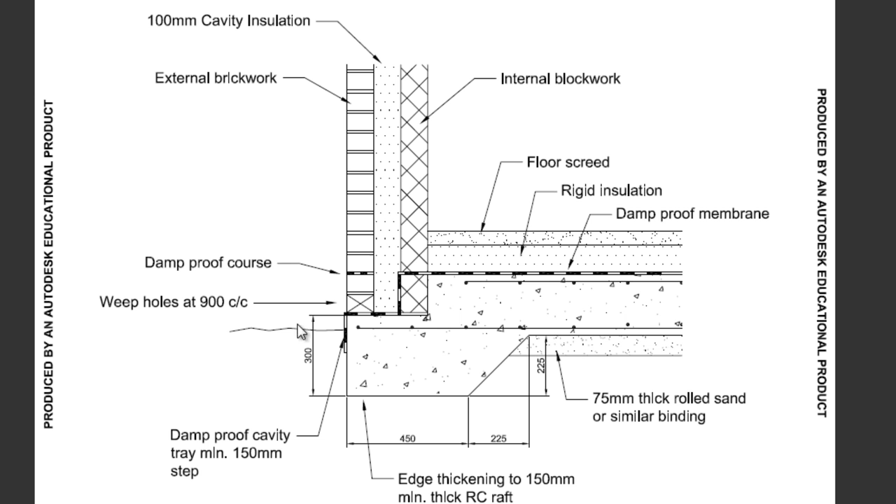Information we have: this is the foundation detail handout with all the annotation. There's not many dimensions on this. There's a 75mm thick sand bed here, 450, 225, 300 down from the bottom of the bricks. You'll notice this is the ground line, and the bricks are above the ground line.

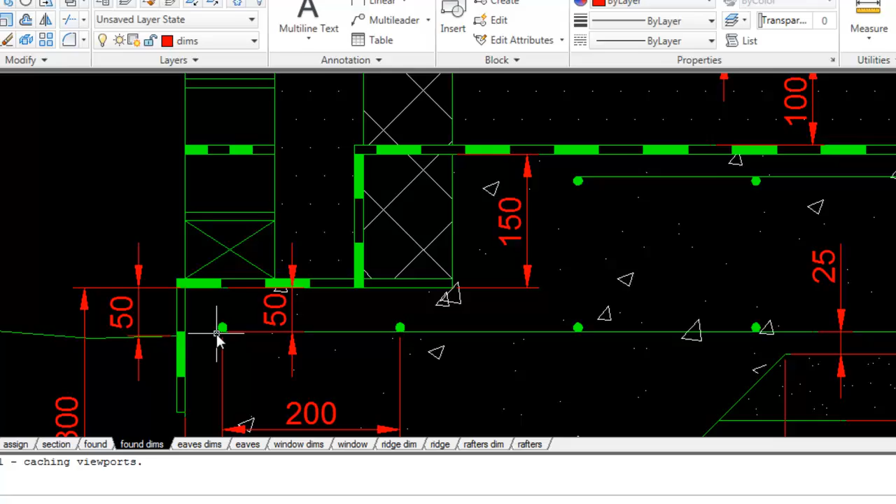I have some more dimensions on another drawing which we'll use to help us draw this. You'll notice there's the ground line, it's 50mm up to the bottom of the bricks. The other thing is 50 down to the rebar. So the rebar, reinforcing bar, is in line with the ground. That's handy to know. Distance in here will be 50 as well.

So the first thing we should do is offset up 50 and trim off the lines for the bricks, the walls, and then draw a line down 300, 450, up here 225, 225, a line across, then offset that one down 75, this line up 25 for our rebar. Plenty of offsetting. Okay, let's get back to the drawing.

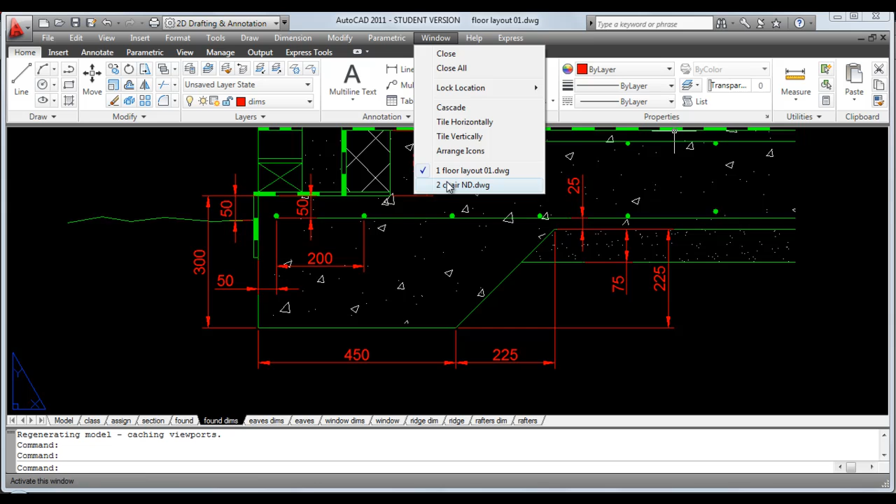Flick over to our drawing, which is this one. First thing is to offset 50 up, trim off these lines here, this line, and this line. And I think we'll also trim this line too. Do I need that line done?

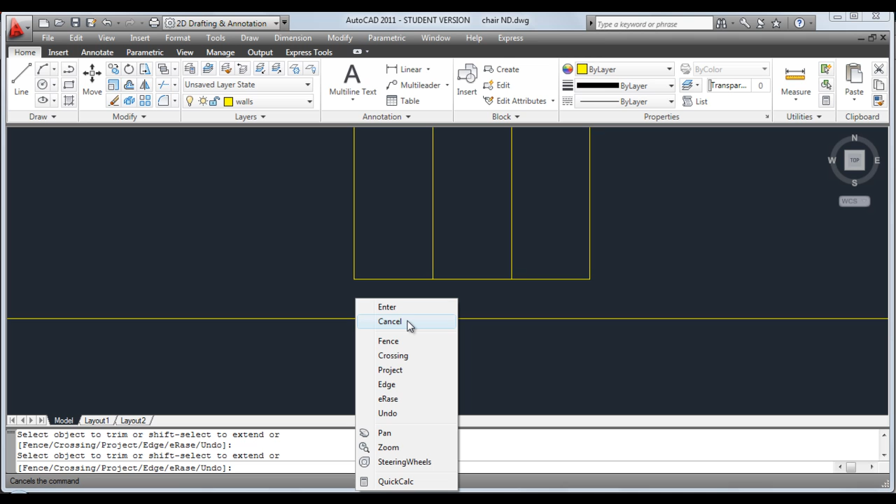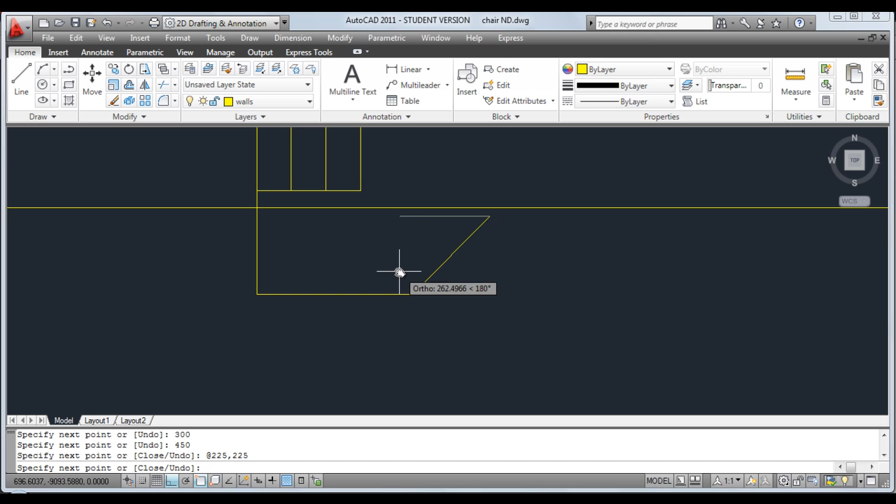Done. Anyway, draw a line from here down 300, across 450. Then use the relative coordinate system at 225, 225, return, and draw a line over this direction to about there.

That will do fine. Offset this line down 75 for the sand bed - actually no, we don't need to offset, we have that line there. Extend that line to there. Say the rebar will come in 50mm from the edge, so offset 50. And use trim to take out that little section there, and then we can erase off that construction line.

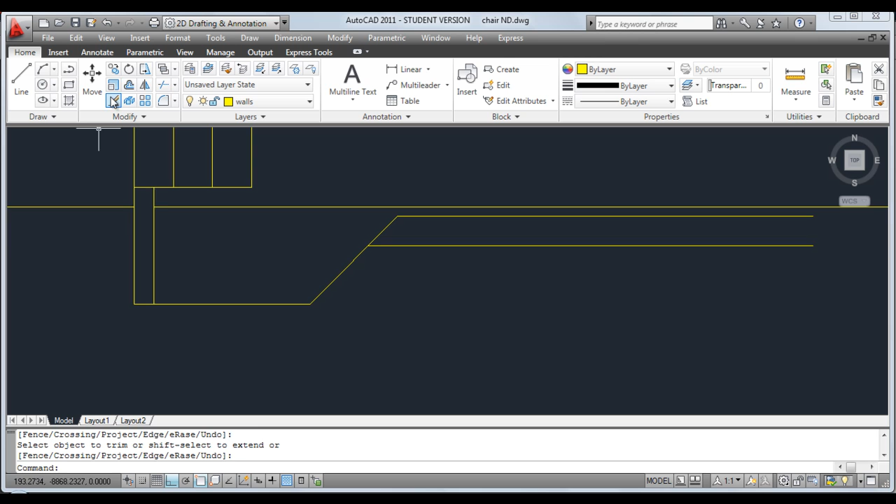Okay, the rebar - this is the reinforcing bar. To draw the bar, we draw a circle here with a radius of 5. We need to move the circle from the quadrant to the end point.

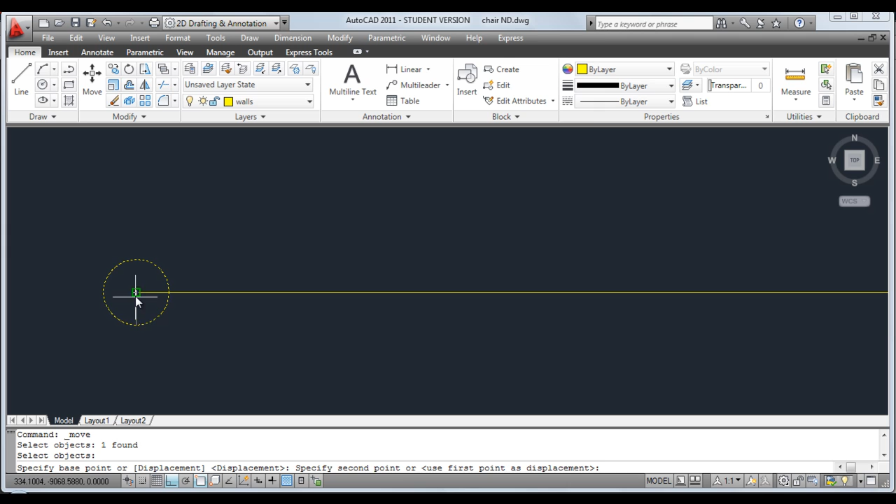We need then to copy the circle from here 200 to the right, and 400, and then 600, and then 800, and 1000. I think that would be plenty.

Okay, let's quickly have a look at our foundation detail again. So that's the reinforcing bar coming along. We've drawn these lines here, these lines here. This reinforcing bar up here, you can see, is in line with that.

Distance up is going to be 2 bricks: 65 for the thickness of a brick, or the height of a brick, 10mm for the mortar, so we're up 150mm. That lines up with that, and that will be our DPM, our damp proof membrane. This is our damp proof course here.

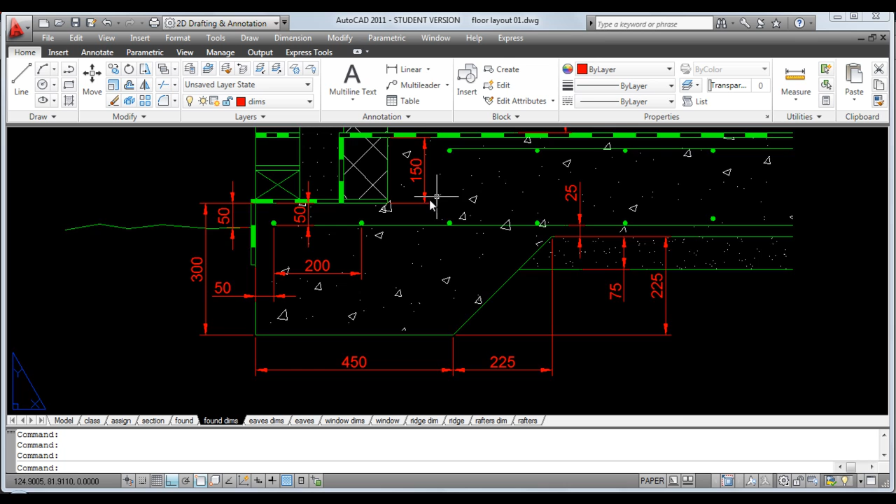Okay, and then this distance here is 100, this distance here is 50. I know that from the other drawing. So it's 150 up, that will be 10mm thick, and 150. So we'll do that, and that distance down there would be 25 anyhow.

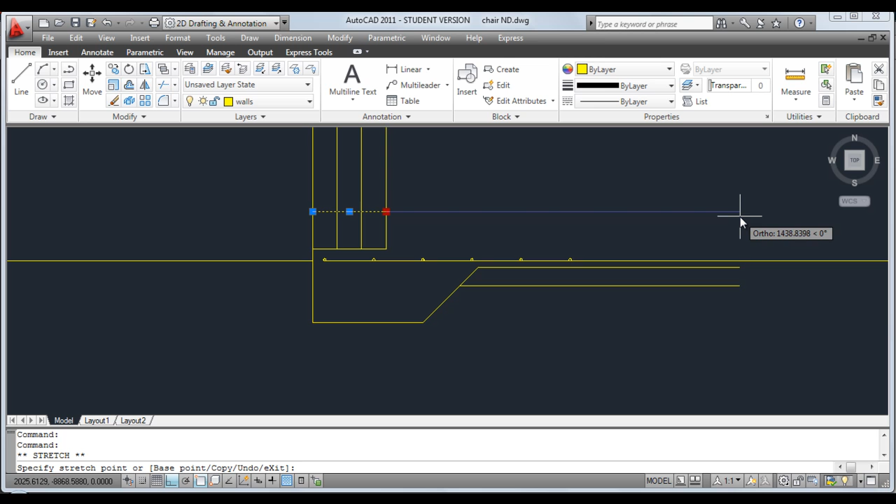So back to our drawing. Going to offset 150. I'm going to make this line longer by simply clicking on it, grabbing one of the grips, so the little blue boxes are moving out to the right. You can trim that line back to there, doing that.

Offset 10 millimeters for the damp-proof membrane, then offset again 100, and then offset last time 50 millimeters for the screed.

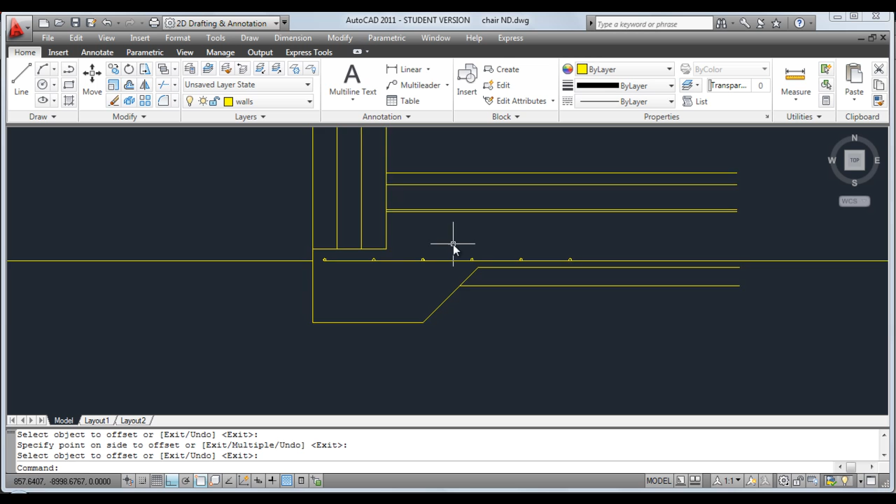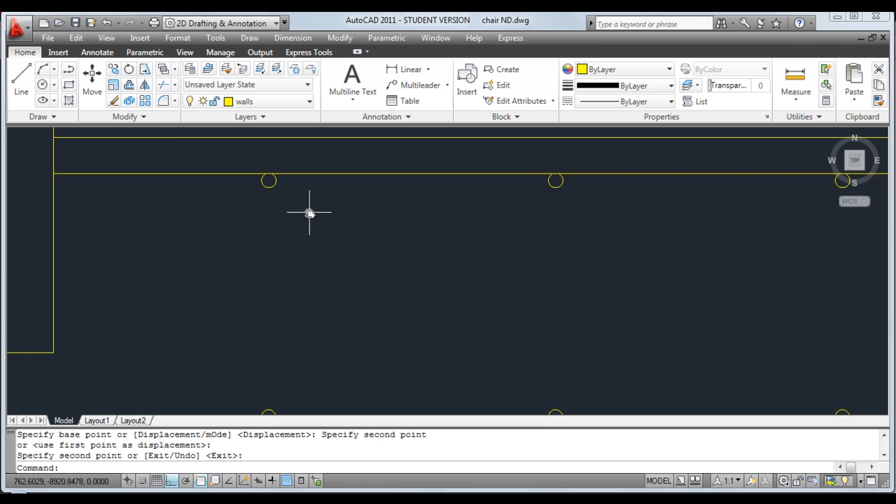The rebar sits 25 millimeters below the top surface. I can simply copy these circles here from the top quadrant to the perpendicular. Use trim, return, take out that bit there.

Okay, I think that's all the lines done for our shape. We need to concentrate now on the hatching.

Have a quick look at this detail again. You'll notice there's a brick here, a damp-proof membrane, damp-proof course here. The hatching is concrete here, sand, sand, and dots, dots, and then crosses for the block work.

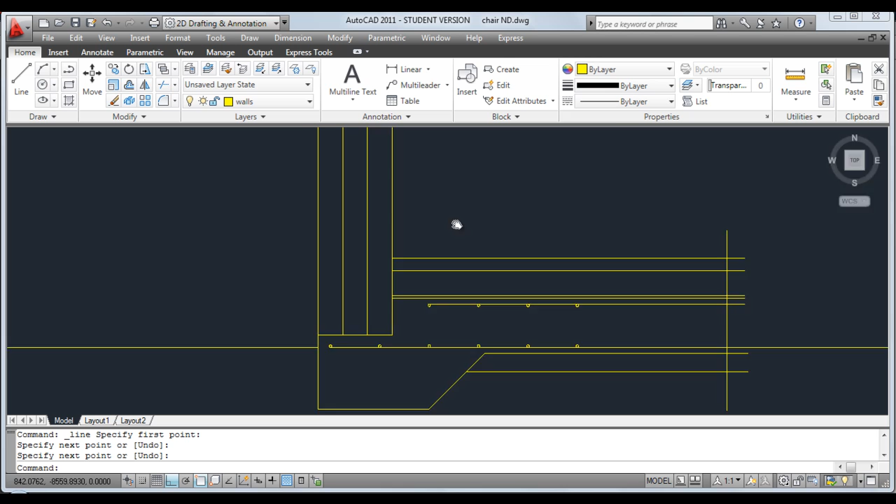Okay, we'll do that hatching first. Now hatching needs an enclosed area, so you'll see these areas here are open at the minute, so I'm going to draw a line down here - doesn't matter, we'll get rid of that later. I'll also draw a line along here to enclose that area up.

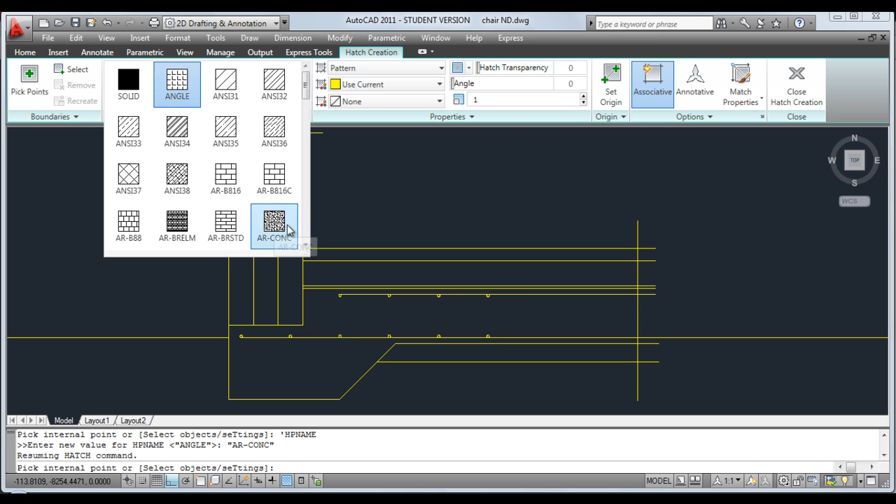Hatch - click on hatch. Select a pattern. The pattern I'm going to select first of all will be the concrete. Just move your crosshairs into the area you want to hatch. If you like it, click, hit return.

Next hatch will be sand. Scroll down until you find the sand. Here it is. Sand's here, and sand's here.

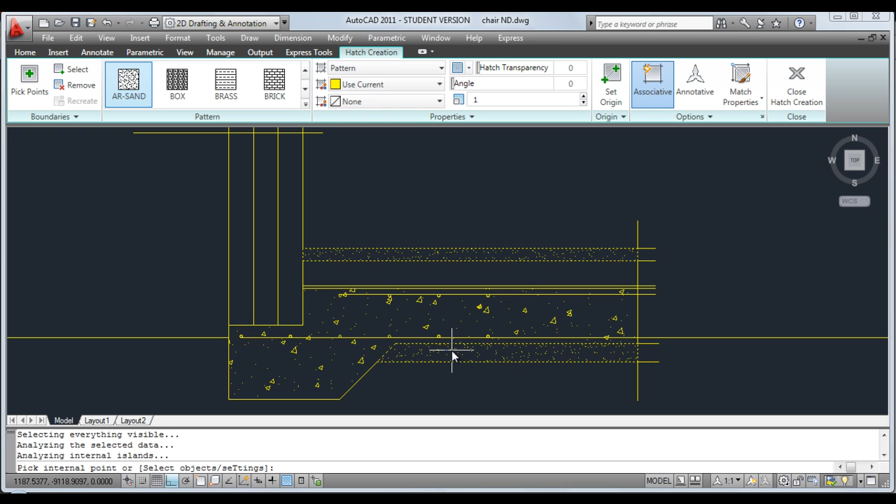You'll notice on each of these hatches we've been doing so far, the scale hasn't had to change. The other hatching we need to do, we'll have to hit return to finish the command. Click on hatch, and in this area here will be, I think it's ANSI 37, there it is there.

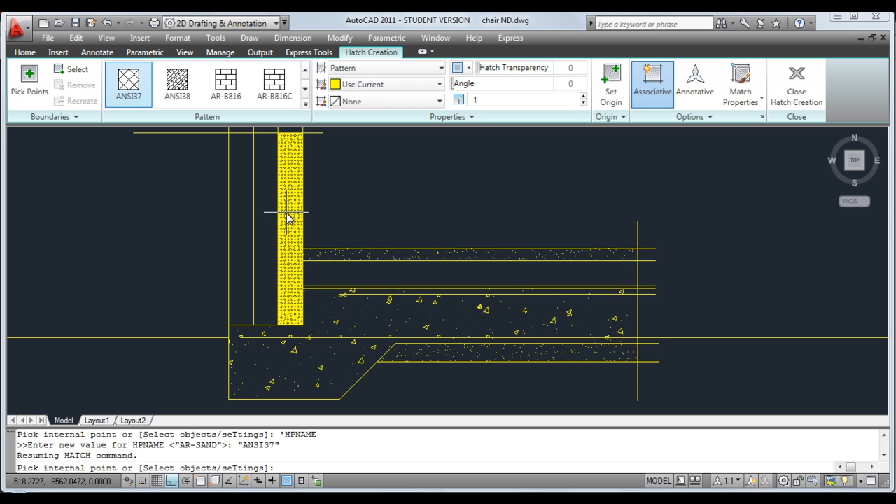ANSI 37. So we pick in that area. Hatch scale will need to change, I'll put in 10. That looks better.

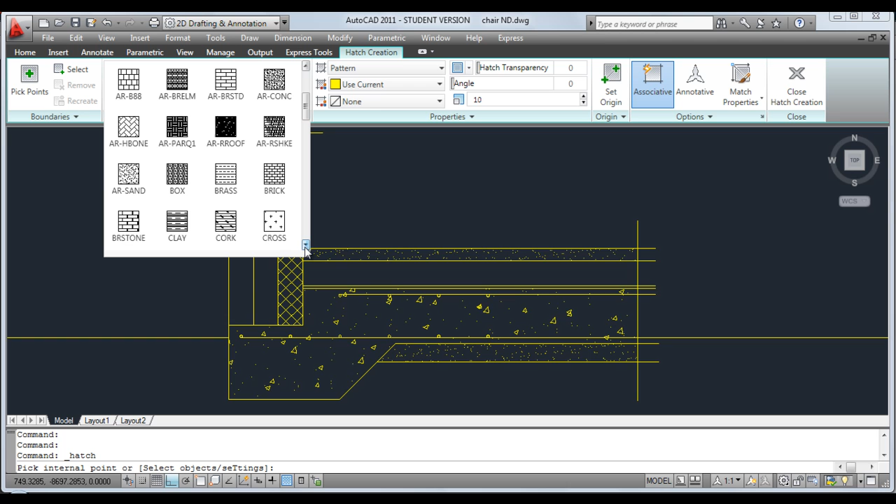We're left with the dots, which can be found here. And that's, I might change that scale up to 20. Yeah, that's better, that's better. Done.

Now, the bricks themselves, as I say, are 65 high, so you offset 65. Offset 65, this line, this side, and then a 10 millimeter mortar bed. I can trim to here those lines.

You can copy these lines for the bricks from this corner to this corner, this corner to this corner. Let's go up a little bit to the top of the hatch pattern. That should do it. Okay, don't need those lines anymore. The limits for our hatch patterns.

Now, DPM, DPC, as you see, has like a dashed hatch pattern. Now, there isn't a standard hatch pattern. You have to make the areas, little rectangular areas, solid hatch certain areas.

So the brick is 100 millimeters wide. It's like 4 dashes there, so say 25 each. With these, you're actually coming down 150 millimeters there, so maybe 75. Takes a little bit of time, but should be easy enough to do.

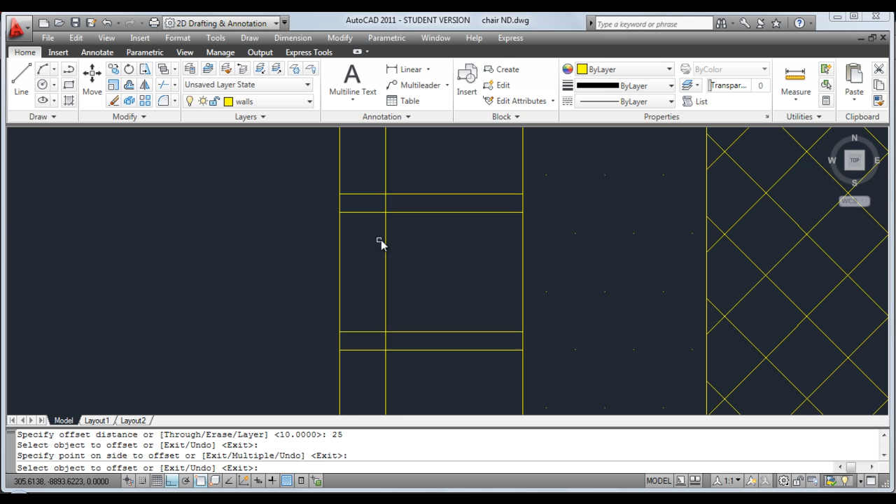So offset 25. And the hatching is going to happen in here, so here to here, here, here to here. Go to hatch. Pick the pattern that you want, which this time will be the very top solid. And this. Hit return. And erase off those construction lines.

Our hatch pattern, or our DPC. You'll need to do the same for the DPM, damp proof membrane, which will run along here. So first of all, extend to here, this line and this line.

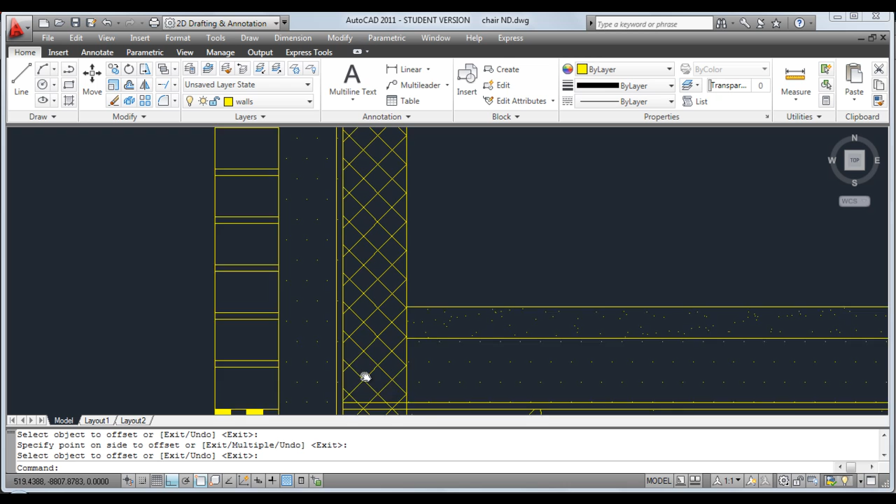I've made that 10mm thick, so I can offset this line 10mm. Shouldn't really hatch in here until it's done the damp proof membrane. That's something maybe you could fix. Don't do your hatching until after you've done your damp proof membrane.

Offset again, 10mm this line down, and this line here. As I say, the end of this line will be 150 down, so draw a little line from here to here and then offset that 150. This line down below.

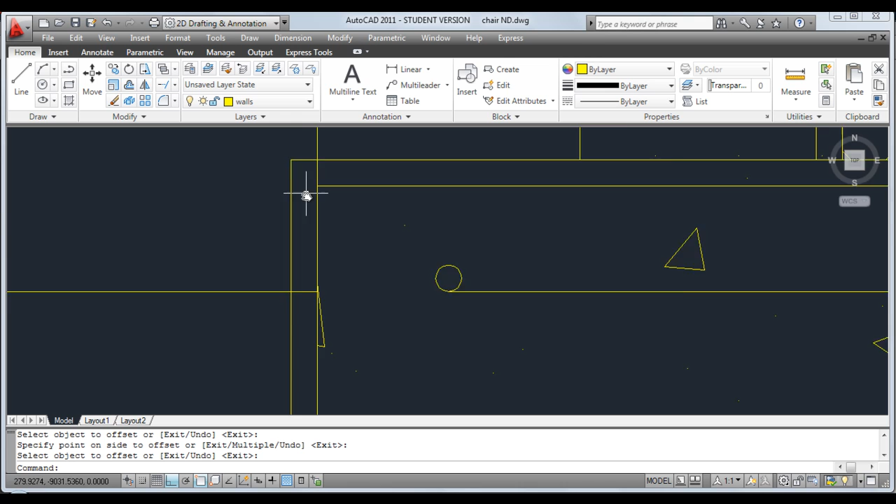You can trim that line and that line there. So the rectangular area here. You join these ones together using the fillet command.

This line to this line, to this. Also got some concrete hatch in here.

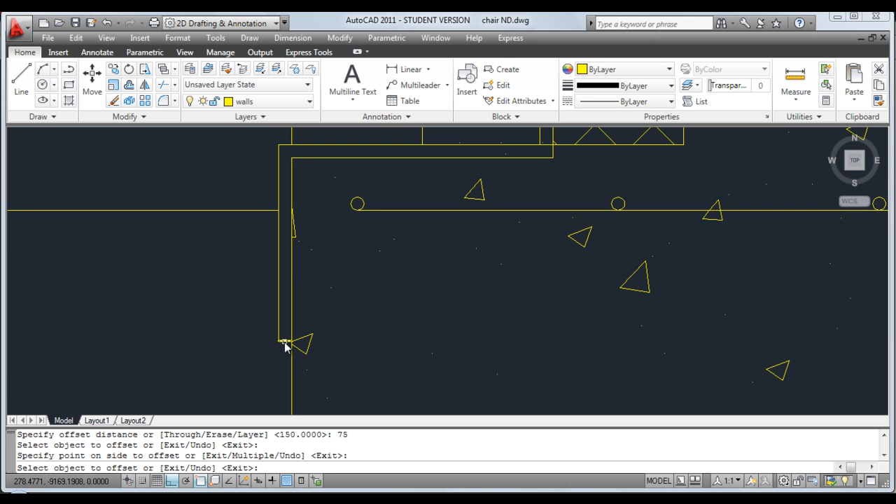Again, little mistake, just the order I do my hatching in was wrong. So offset 75, I think that would be a good size. 75 up. Did 75 down by mistake.

Okay, offset this line, 75 across. 75 across this way. I can then offset this line up 75. Again, another 75. Offset this line to the side, 75.

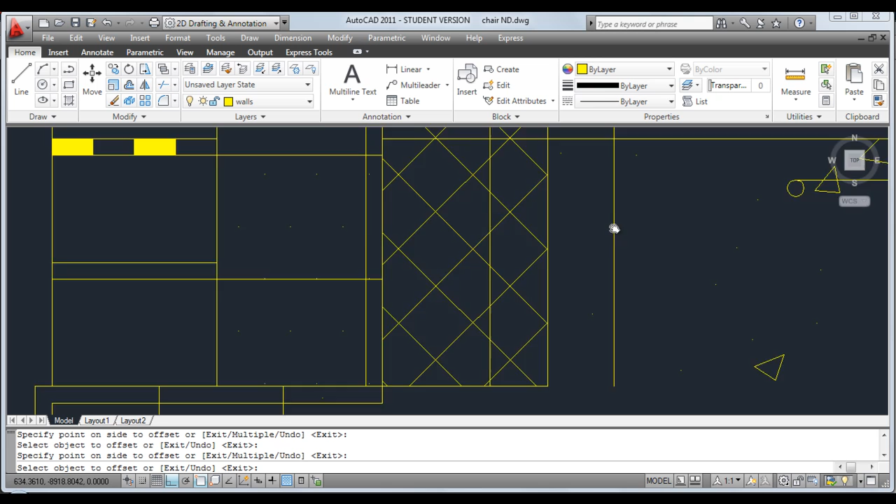This line 75. 75. 75. And keep going along. I'll only do a bit of it. Okay, that should do. Hatch then.

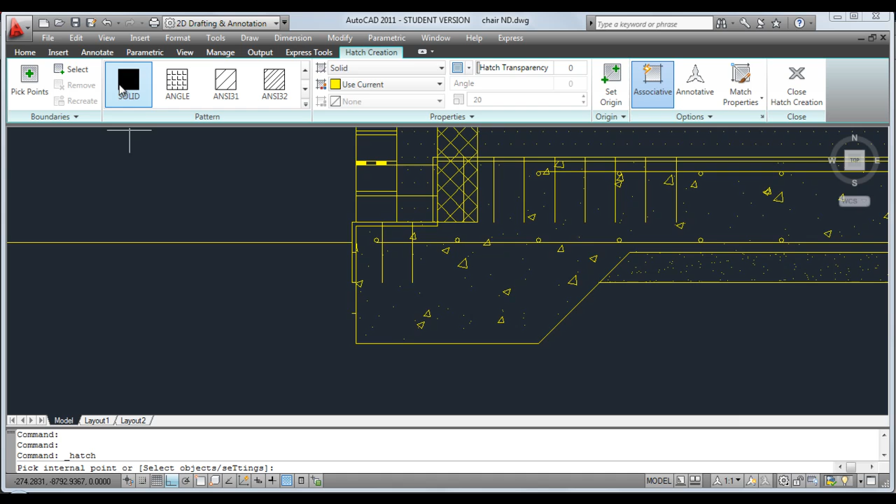Hatch solid here. Oops, should have a little bit in there, so skip out of that first and draw a little line from here to here. Back into the hatch, solid. This one, this one.

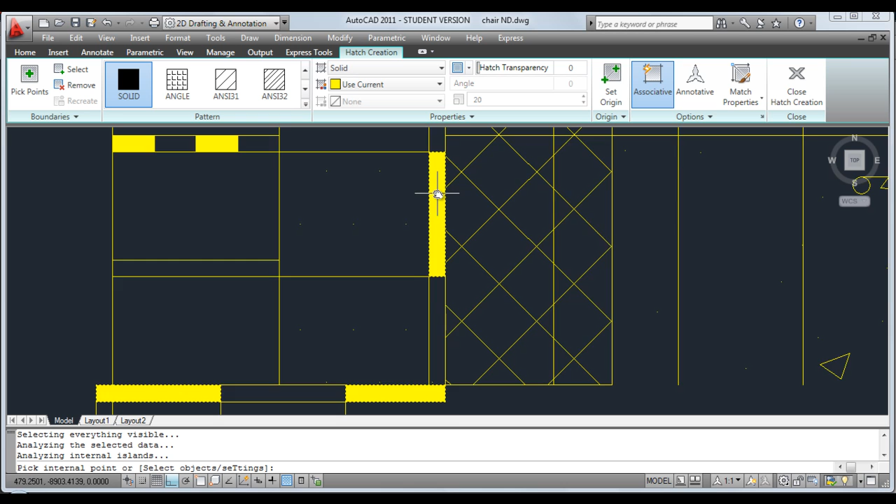This area. This area. This area. This area. This area. And that will do me. As I say, you can continue on. Erase off all the construction lines which were helping you set the limits for your hatching.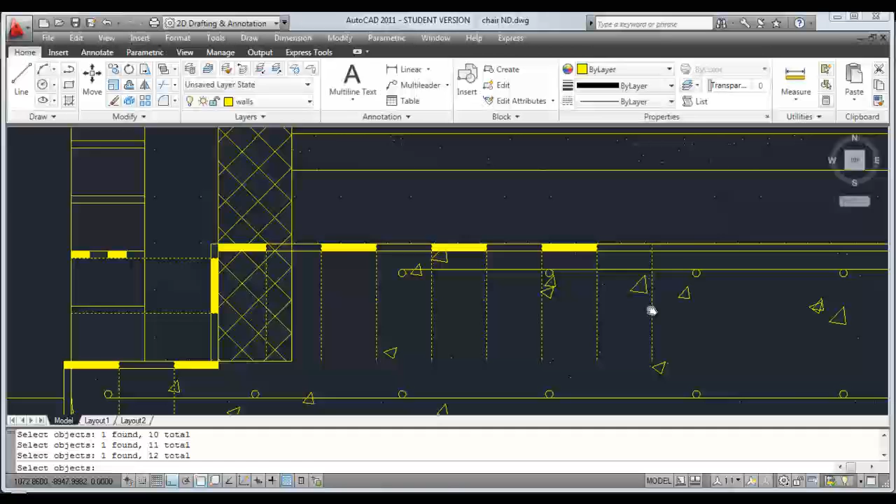This line, this line. I think maybe you should keep in mind is the rebar should be hatched in solid as well. So each of these circles should have a solid hatch pattern. It's minor, but since you're doing a close-up detail, it will get noticed.

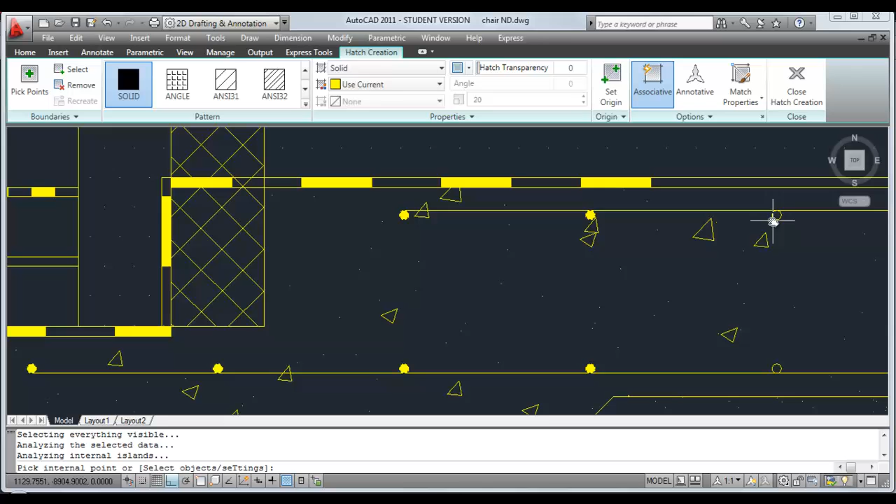Obviously easier to do first, and then you could have copied these rebar circles with their hatch pattern. And done. Turn. Yeah. A few minor little mistakes by myself there with the hatch pattern, but easy enough fixed.

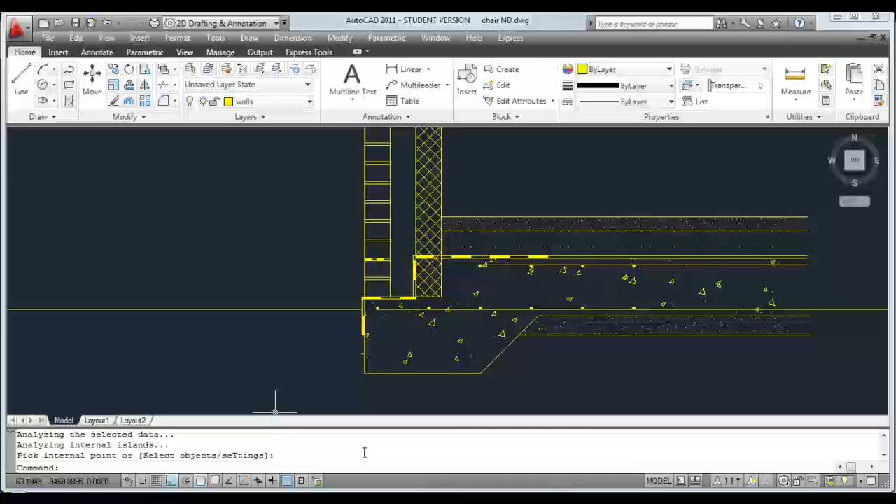And that, I believe, is the detail done. It's just a matter of adding annotation on the viewport in paper space. Quick look - yes, got everything in position. As I say, just need to add annotation to that to finish it.